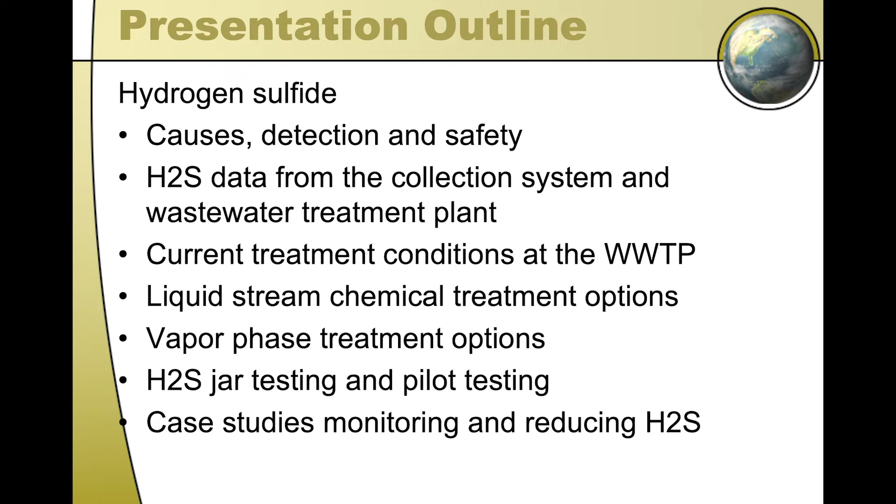So, who works at a wastewater plant? Does your plant have odors? Who has odors at your plant? Which plants don't have odors? Are any of you nose dead? I'm not nose dead yet. I had COVID and lost it for about half a day, then it came right back again.

Can you guys go into your primary clarifiers? How many can? How many can't? Okay, I can't. Been there 35 years and they ask me, why do you work here? I don't know, I'm trying to make things better.

Assuming you can read this, can you guys read this in the back of the room? Because I'm being cut short on my time again. So we're going to look at sulfides, hydrogen sulfides, where it starts, where it arises, a lot of times in the collection system. Bismarck has 22 force mains, 3 private, we work with those as well.

We'll look at the liquid stream options and the vapor phase options. In the water it's called liquid, and once it comes out from turbulence, it's called vapor, and that's where we get complaints from, along with lots of corrosion. And we did lots of testing.

I'm a lab rat on H2S, and we have a lot of case studies here to talk about. This is getting a little smaller. So we always want to know how wide is it, where it's at, what we can do about it, who owns it, what's the flow rates, what's the equipment.

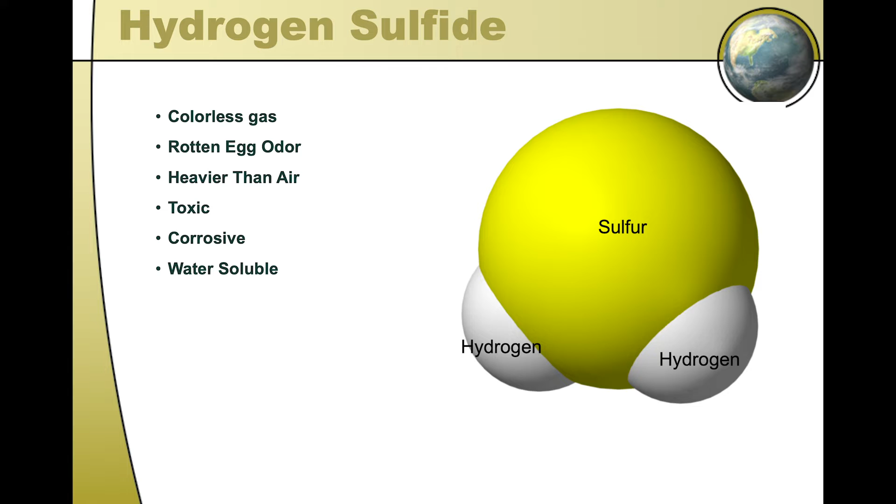So sulfides, rotten egg odor, heavier than air, once it's settled it's toxic, corrosive. We built our new pretreatment building in 2008, and about 8 years later we had $1 million worth of damage from the sulfides. They ate all the concrete, and then pretty soon it started leaking through metal pipes.

Well, this is really small. Okay, so hydrogen sulfide, some people are real sensitive, like me, 0.5, 0.03, I've heard some people say. Then you have all the other stuff that can come out in your sewer system.

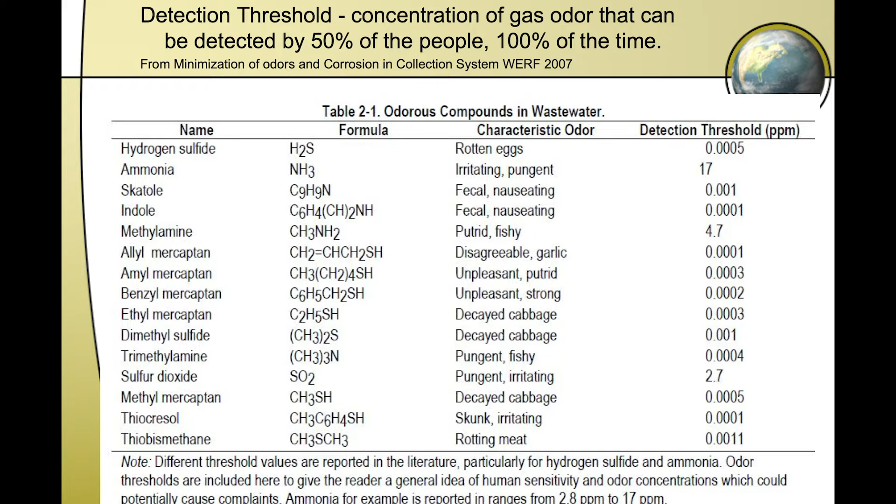Once you start getting above 100 parts per million, you start having some serious issues, let alone in a 10-hour working environment, 8-hour working environment, 10, 20 for a short period of time. And yes, workers can be killed in an environment where they might be exposed to really high levels.

Well, there's a lot of factors that affect the production of hydrogen sulfide. It might be kind of small, so I'll read them. The biggest one is detention time. How long does it sit in your force main?

How often do you refresh your grease interceptors? And what's the temperature? In the winter, we can caustic wash a force main and have 2 or 3 months where it'll stay way down. But in the summer, you get 10 days and it's coming right back up again.

Your BOD, obviously, as everything becomes more efficient, your toilets use a gallon instead of 5 gallons, your washing machine uses 5 or 10 versus 40. We're using less water. Bismarck's wastewater is the same volume as it was 20 years ago.

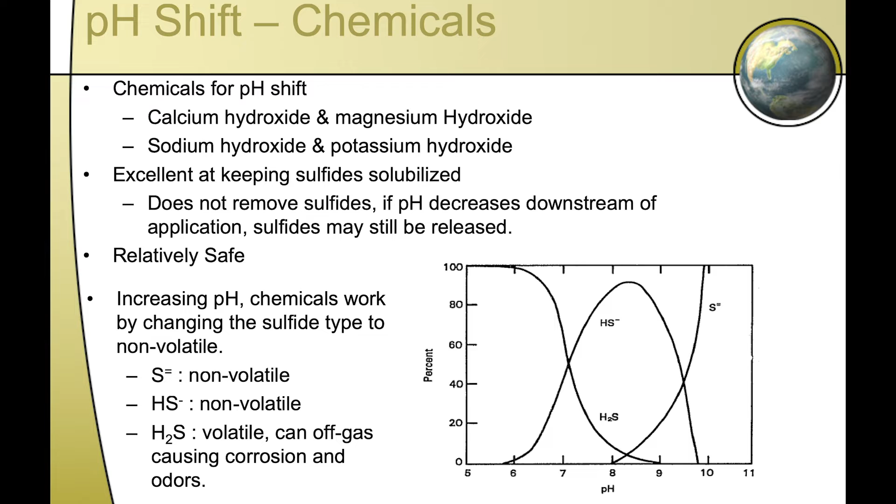The factors that influence H2S releases - the main one is turbulence and pH. For example, at a pH of 7, 50% is HS and 50% is H2S. Only the H2S comes out. If you shift your pH to 9, only 1% can be H2S. That's where caustic helps to clean, or you could use other different chemicals. However, there's an equilibrium, and we'll talk about that more. S-2 is non-volatile, HS is non-volatile.

We've tried a lot of chemicals - calcium hydroxide, magnesium hydroxide, kind of the same.

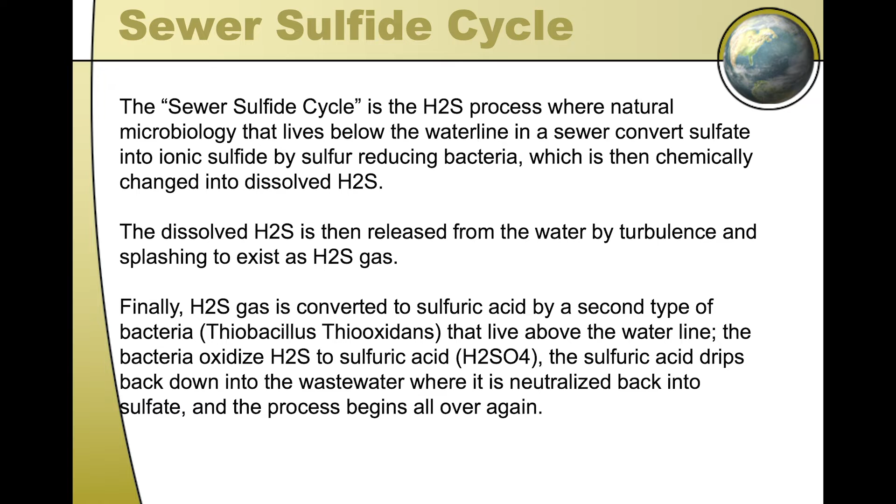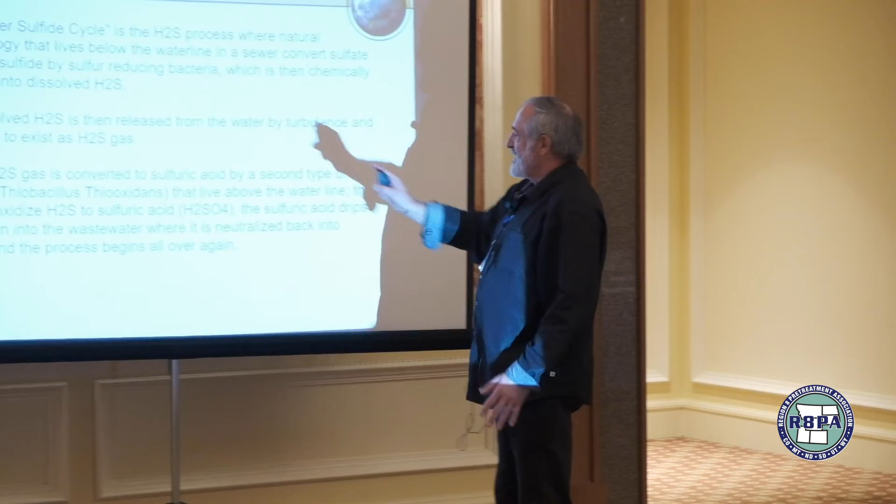When the water runs out of oxygen, the bacteria will get oxygen from where? From sulfate. And then it converts it to H2S. There's the bacteria, Thiobacillus thiooxidans - it's just bacteria related. Once it comes out, it forms sulfuric acid from another bacteria.

But it only happens when the pipe is not full. If the pipe is completely full, there's no release, there's no crown. If you have bad air releases, you'll get crown cutting in your force mains, and it'll eat up your concrete. Why? Because it forms sulfuric acid. What does sulfuric acid do to concrete? It turns your concrete to mush, then it eats away your pipes.

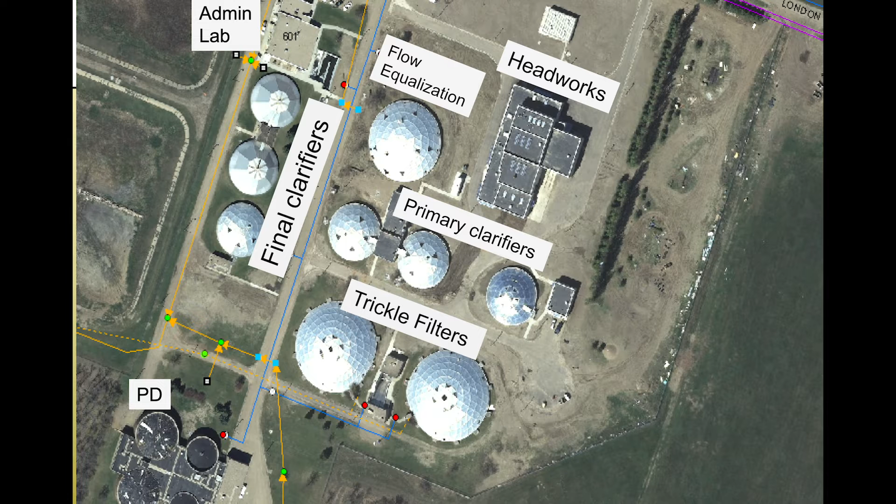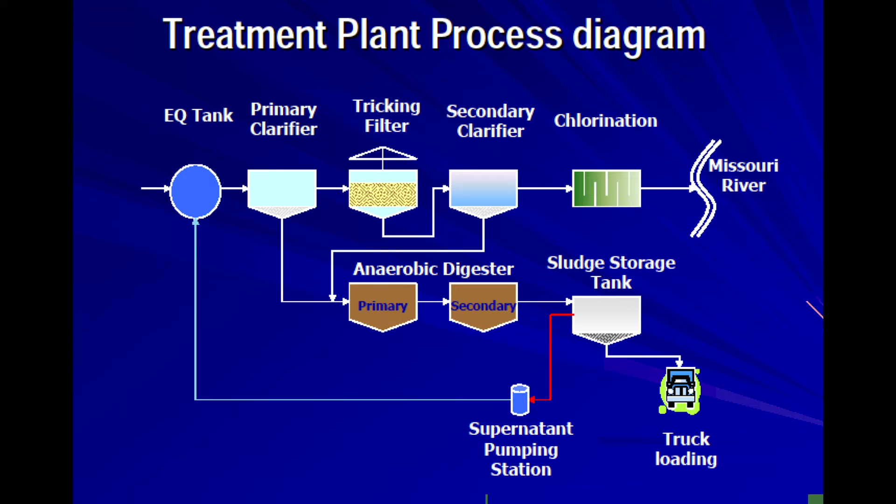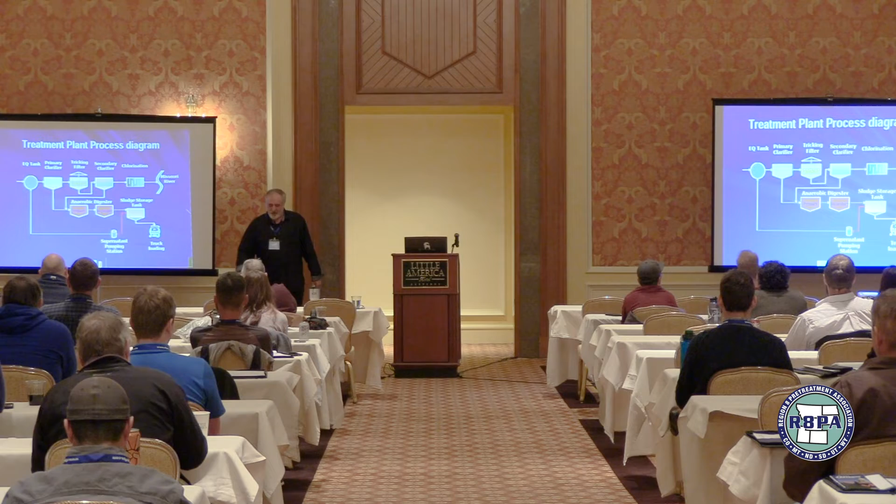So the plant water comes into the headworks or pretreatment building, then either equalization - we're going to add another 1.5 million - and then our clarifiers, and then to a trickle filter, we actually have a third one now. IFAS would probably have been the real thing to go to. Then our final clarifiers, and then we add chlorine and SO2, and then we have the solids processing - anaerobic digestion, thickening.

So where else does H2S come from in our system besides force mains? We haven't done this in a while, but this is from our grease interceptors. We try to get out to the grease interceptors every year and inspect them - are they pumping or not? Do they forget?

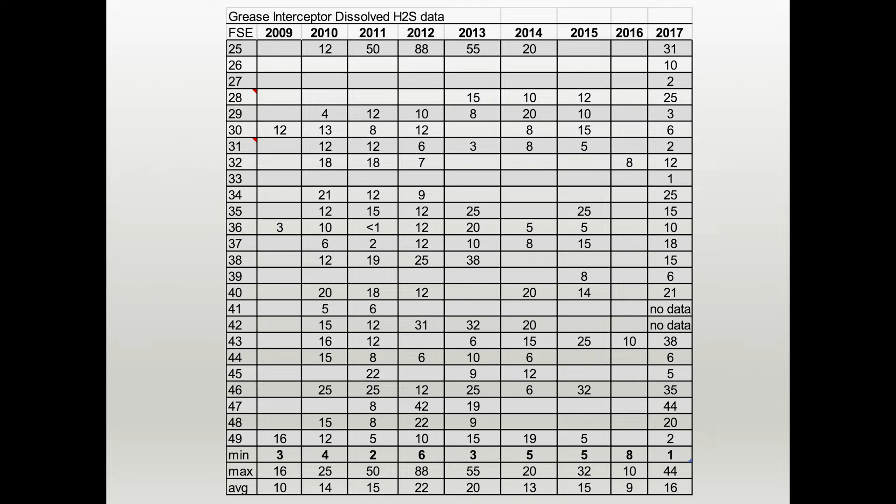I have some averages and some maxes for the years. Here we have 88 parts dissolved H2S, and the pHs are really low too. Do you have pHs on this one here? No - they can get into the 3s and 4s, and they can create a lot of odors. So what we don't want to do is over-design our interceptors - we want to right-size them, make them reasonable size.

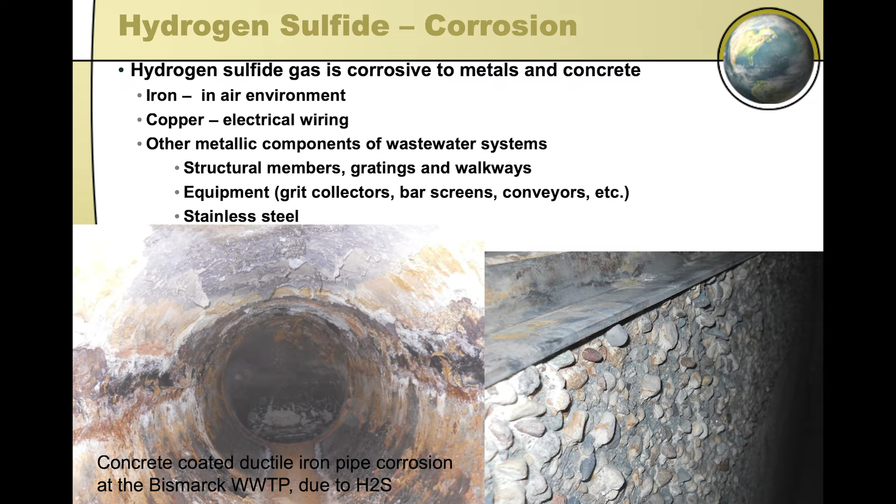We're going to have some pictures here. This is what happens with your concrete pipes - it eats it away, and pretty soon it comes out. This is what happens to metal, much like Adam talked about, from low pHs - like Coca-Cola. Not to pick on Coke, but did you know the pH of Coca-Cola is 3.2? Eventually, when you have high pH concrete and low pH acids, you start to eat away. It also affects your copper, electrical, structural integrity - it even attacks stainless steel.

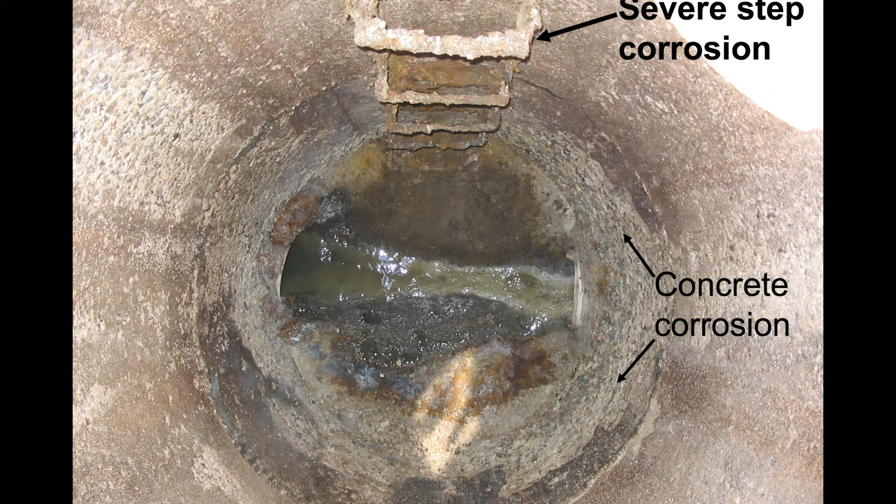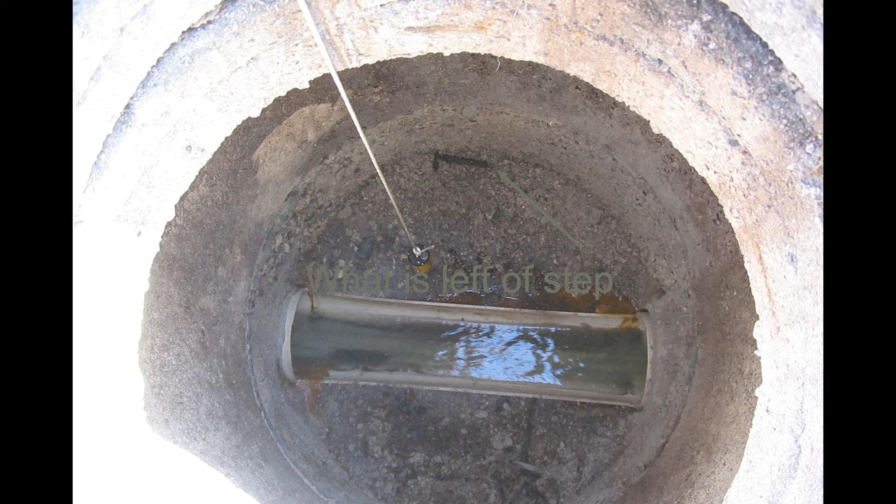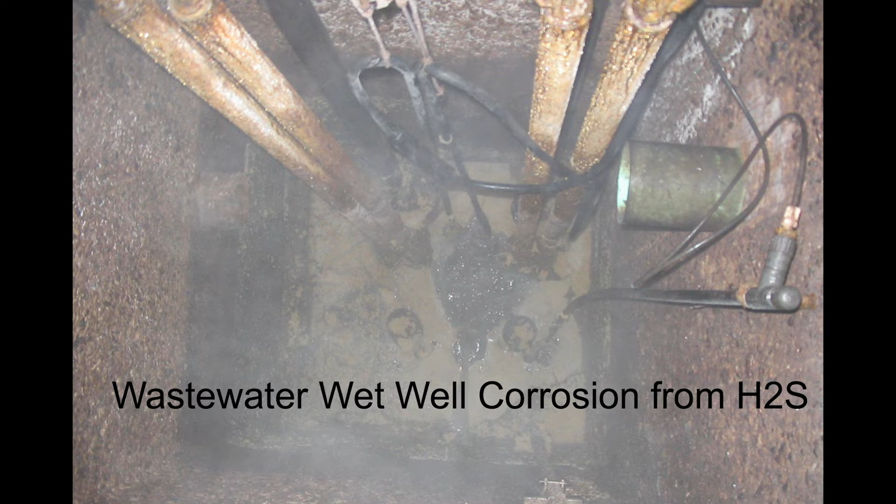So here's kind of the first step of corrosion you're going to see - your steps start getting corroded away. Then some more corrosion, and you can see the severity of corrosion. This is all from H2S - you can see the same thing for pH. Further downstream, there's not even any steps left. Does the pointer work? Nope. In fact, right there, that's what's left of a step. We actually had to go through here and replace all those manholes, which was caused from a force main.

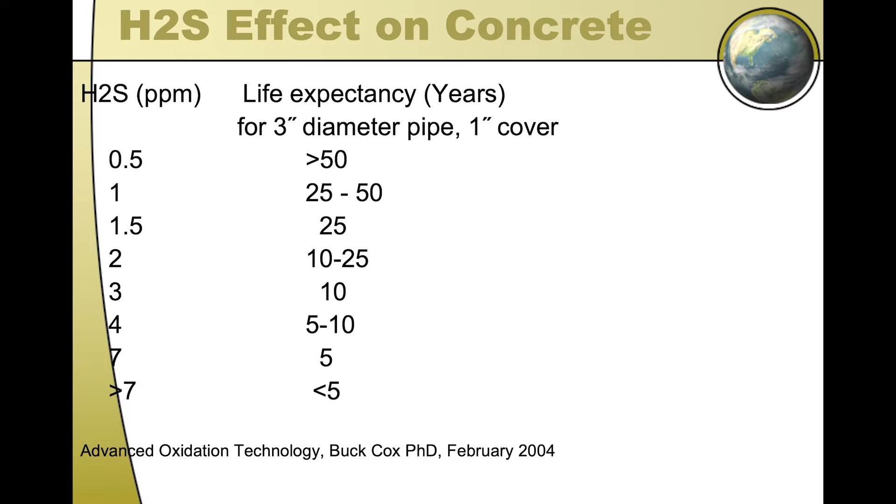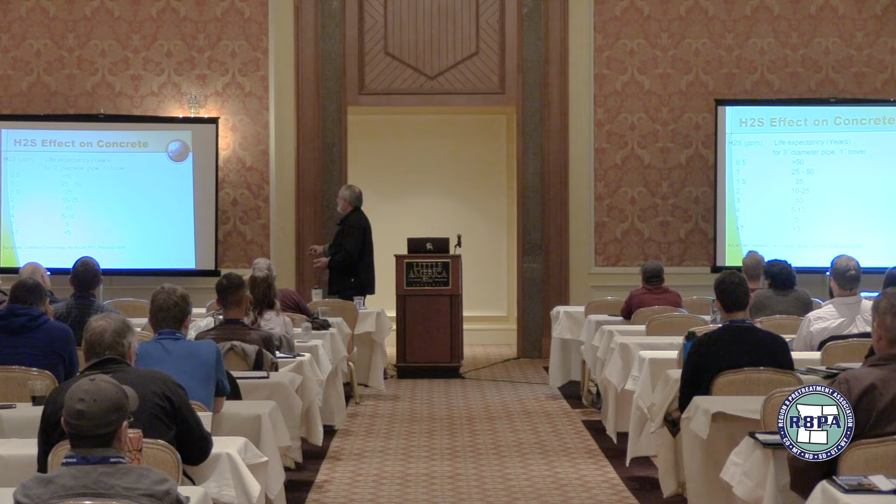How high does the H2S have to be before it eats all your concrete up? This is life expectancy for a 3-inch diameter pipe with 1-inch cover. The higher the H2S, the shorter the life, maybe 5 years continuous exposure. We try to keep H2S at an average of 5 all the time, but we aren't quite doing that this summer.

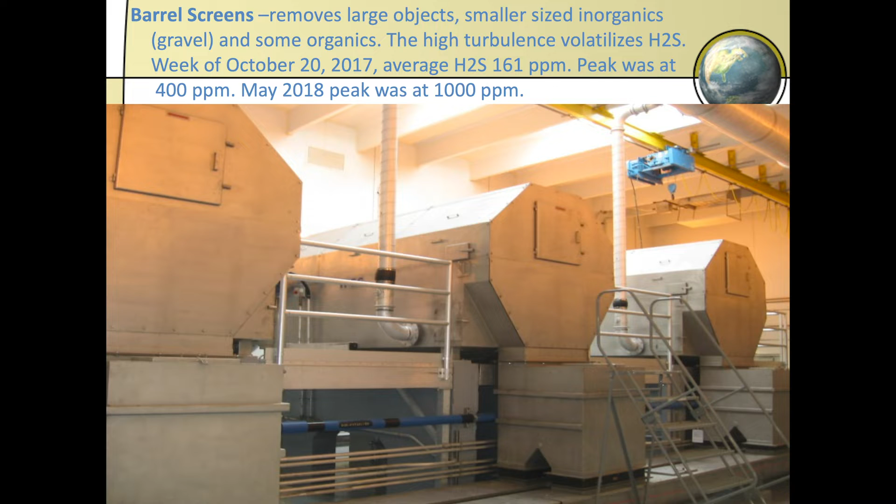One of our first steps, besides the splitter box, we have these big self-cleaning barrel screens, maybe 6 feet in diameter, 12 feet long, I can't remember exactly. Here's what they look like brand new.

Self-cleaning pushes it out, solids come over and drop to the bottom. Here's another picture showing how it pushes the solids forward. That's what happens when you get a lot of rags coming in. We do a lot of public education on rags too.

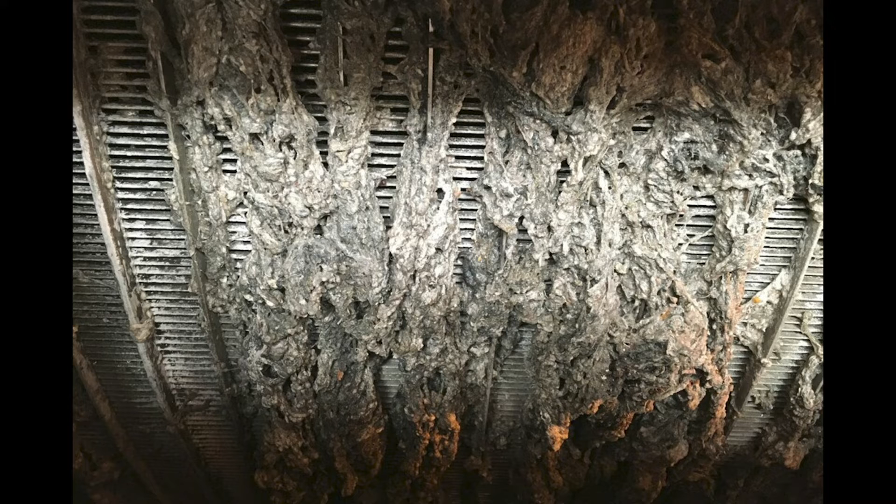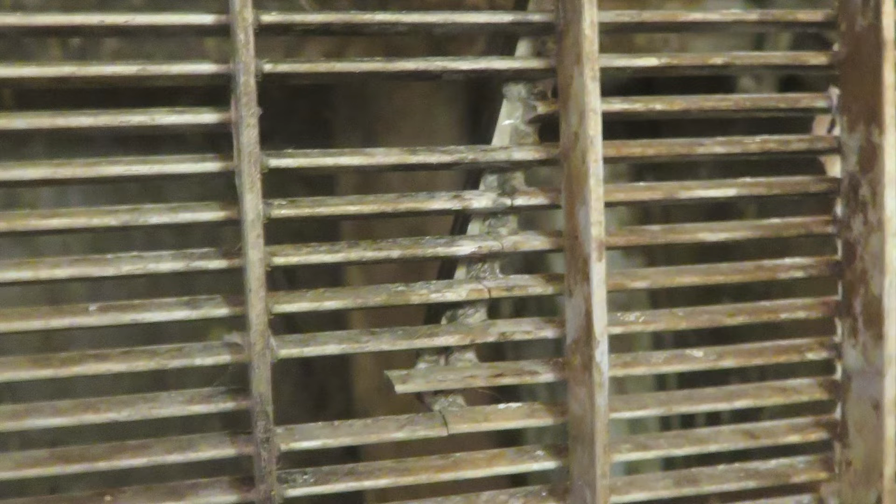That's another presentation I could go on about for half an hour. What do rags do? They like to blind up your screens, and when you grind them up, they get small and start latching onto things.

And what do the sulfides do? They're starting to eat away our stainless steel screens. Our grit chamber is all stainless steel too, and they had to be replaced. They only last about 10 years, when normally we should get 20, 25, or 30 years out of it.

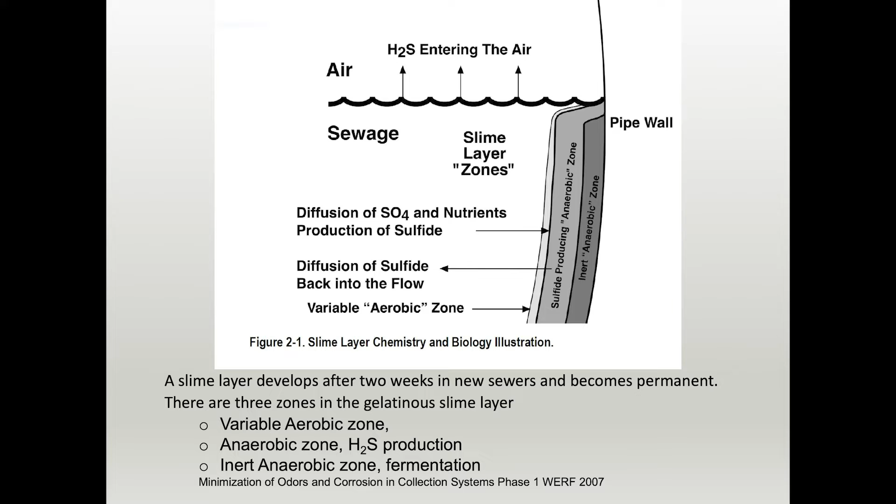A slime layer can develop after 2 weeks in sewers and becomes permanent. There are 3 zones in the gelatinous slime layer: a variable aerobic zone, an anaerobic H2S zone, and an inert anaerobic zone, where fermentation occurs. This whole slime layer is probably as thick as your fingernail.

This happens in water lines too. If you don't keep the water fresh and moving, once you've established biofilm in a water line, you can't get rid of it. However, in sewer lines, you can temporarily remove it by pushing caustic in, getting the pH up to around 12, killing things off, and degreasing.

Here's another colorful one. This came from the 'Minimization of Odors and Corrosion in Collection Systems, Phase 1,' from the Water Environment Research Foundation, 2007. It's about 300 some pages long, and some of these pictures came from that. Very informative if you ever want to work on reducing sulfides in your sewer collection system.

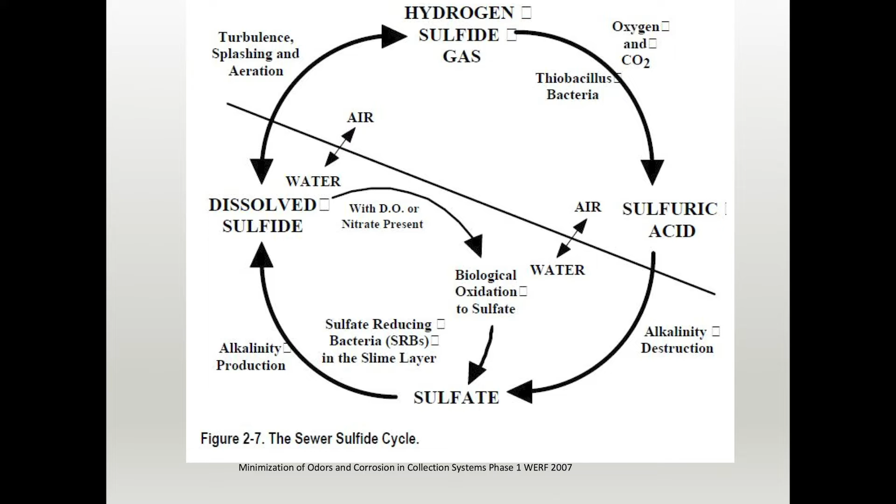Here's your pipe wall, anaerobic zone, sulfide-producing zone, and laminar flow layer - it's a cycle. Let's keep going, here's your H2S cycle. As far as corrosion control or odor control, you can intervene at those different stages. Here's your fancy bacteria - alkalinity destruction, water, sulfuric acid comes back in. It's called the sewer sulfide cycle.

All right. Oh my God, this is small. Whew.

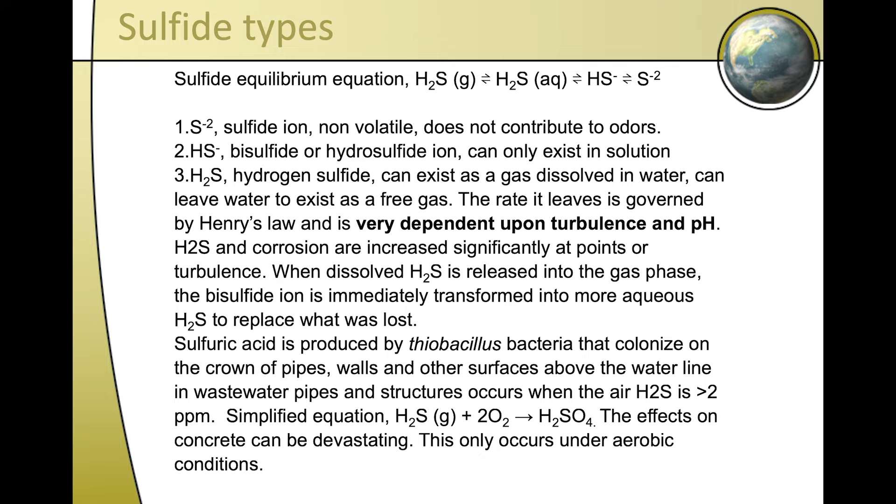S-2, the sulfide ion, is not volatile and does not contribute to odors. HS, the bisulfide or hydrosulfide ion, can only exist in solution. And H2S, hydrogen sulfide, can exist as a gas dissolved in water, and can leave the water to exist as a free gas. The rate it leaves is governed by Henry's law, not Stokes' law, and is very dependent upon turbulence and pH.

So wherever you have turbulence in your sewer system, that's where you get your H2S released. You can do a lot of things to help keep it released, and it's going to affect the crowns of your pipes, the walls, and surfaces above the water line.

You can prevent the first pathway by using things that inhibit bacteria, like anthraquinone, or caustic slugs that we talked about earlier. It can grow back in 3 to 10 days though, and in winter it takes a lot longer because of temperature.

The second pathway, we can use chemicals - we're fighting a liquid phase at that point. Oxygen injection, chemical addition like nitrates, iron salts, peroxide, potassium permanganate, chlorine, ferric chloride. Fargo uses ferrous chloride, is that right, Mark?

What do you guys do? You're on calcium nitrate now? Yeah, we did a lot of experiments in different areas in our city, pilot testing at 5 different sites actually for that.

Where you have a force main coming into a gravity pipe, do you want it to drop and release, or maybe you want to come in below the surface of the water so you can push the bar farther, so it doesn't come out in residential neighborhoods and manholes, and you get a lot of complaints from that.

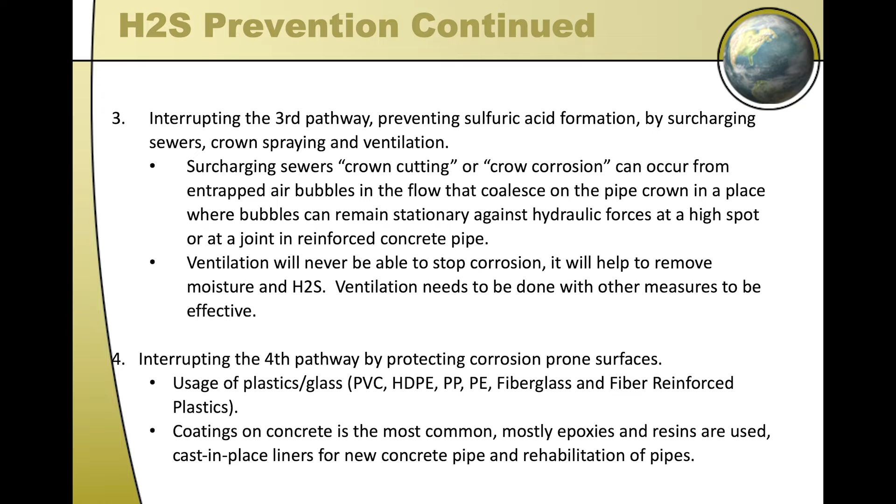If you have H2S and it's in a gravity line, you might want to think about using PVC, high density polyethylene, fiberglass, polypropylene, fiber reinforced plastics, coatings. The coatings have improved a lot. A lot of our coatings have just been ripped off and the concrete turned to mush. In our splitter box for our barrel screen, our splitter box for our primary clarifiers, we're still working on them right now, and we did some of this year as well.

Epoxy resins work pretty well. Again, there's newer technology you might want to look into about what you coat them with.

Oh, like 20 minutes. I have to keep track of my time here.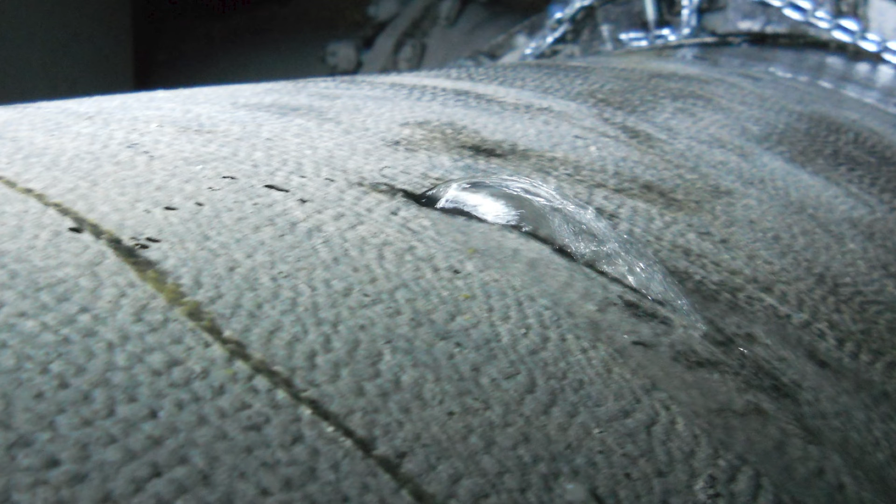And so we're continuously trying to fight that corrosion and protect our infrastructure. Very expensive to replace your infrastructure. This is our old pretreatment building. Again, pretty soon we started seeing water leaking out of our pipes.

And we strapped on, we epoxied, and it just kept getting worse and worse. Whatever we did, we tried putting plugs on it, and pretty soon they were gone. You can see right here, the concrete is all gone on the top. And then pretty soon it started eating away. These pipes are only 8 years old.

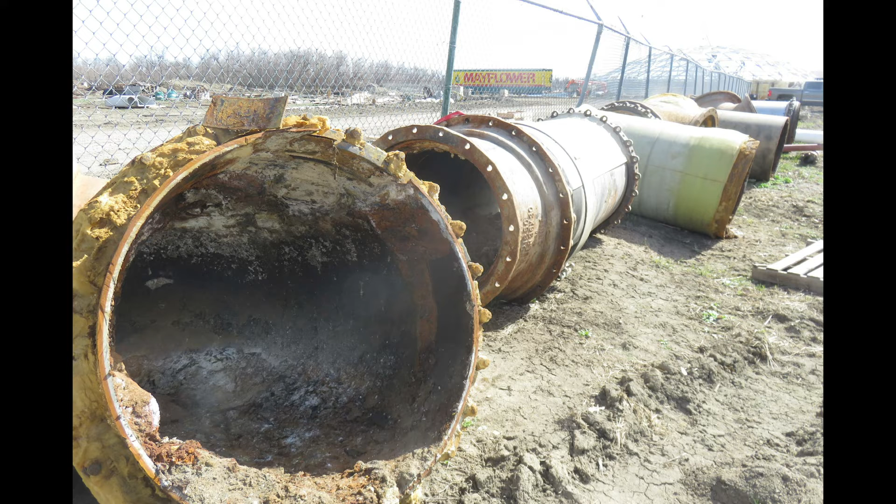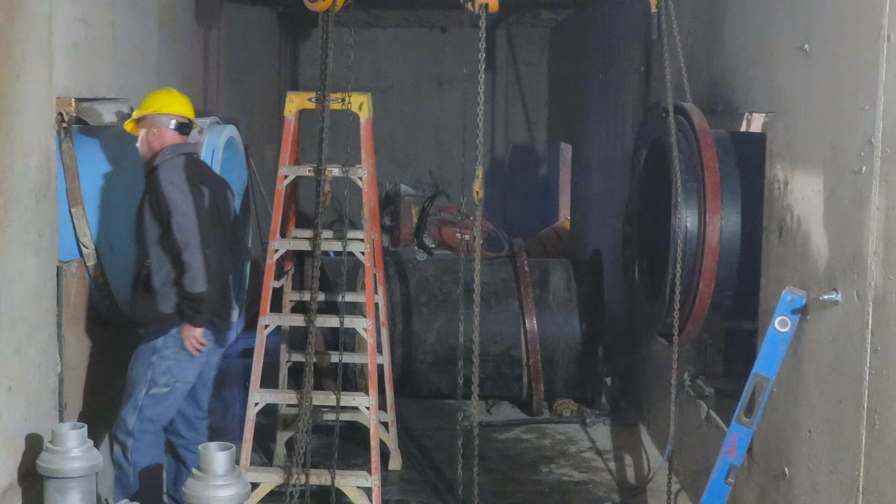What do we have to do? Oh, rip them out. Keep them from leaking out the door and having SSOs from our pretreatment. And here comes the blue pipes - 30 inches, 24 inches. There's a little bit of metal holding them together in some places.

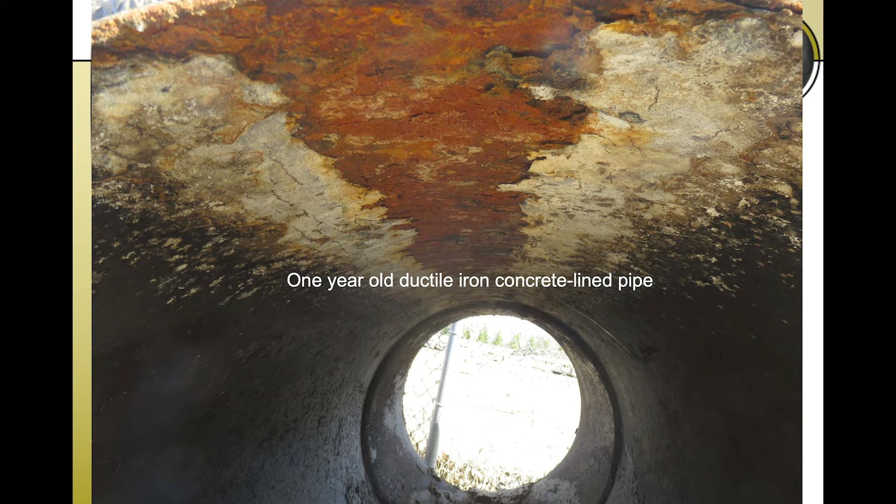Here's a 1-year-old ductile iron pipe. It was supposed to be full of water, and it came out of our primary clarifier, and most of the sulfides are gone already. However, this pipe only ran half full, and it cut this groove right on top, and it's eaten away the concrete - it's kind of like mashed potatoes.

And then pretty soon it's going to eat a hole right through it. So this is another close to $1 million, half a million dollar project to either reline or replace. We got a quote on it - it was pretty good, and then he backed out, forgot that he forgot to add some money in it, and he wants to back out. But again, that's currently happening right now.

What can you do? Nitrate salts - what's Fargo doing right now? Minot, North Dakota is looking at that. Iron salts, we've tried those - we do have that at the treatment plant. They kind of precipitate it out.

Nitrates give it oxygen. Oxidizers, many different types. Oxygen - that's what I'm in favor of. In about 2 years from now, we're going to get some oxygen generators right before the plant. We're going to pipe alongside it and inject oxygen into it, maybe 40, 50 milligrams per liter, so it ties the H2S up before it hits the plant. We know we won't be able to do all of it, but maybe 80, 90%, and at least try to protect our equipment more. You can also mess with the pH - remember how that pH, if you shift the pH, then you have the HS versus the H2S.

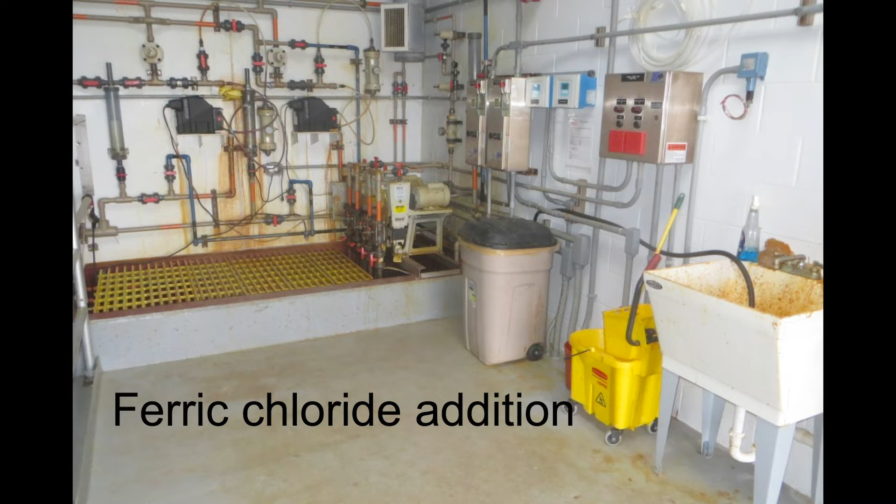Nothing's forever. Oxygen, we talked about earlier, that's what I want to see. At the plant, chlorine, we've done that a lot. Ferric chloride, ferrous chloride, which Fargo used to add, as far as I know. pH shifts, okay. This is where we add ferric chloride at the plant, stains everything.

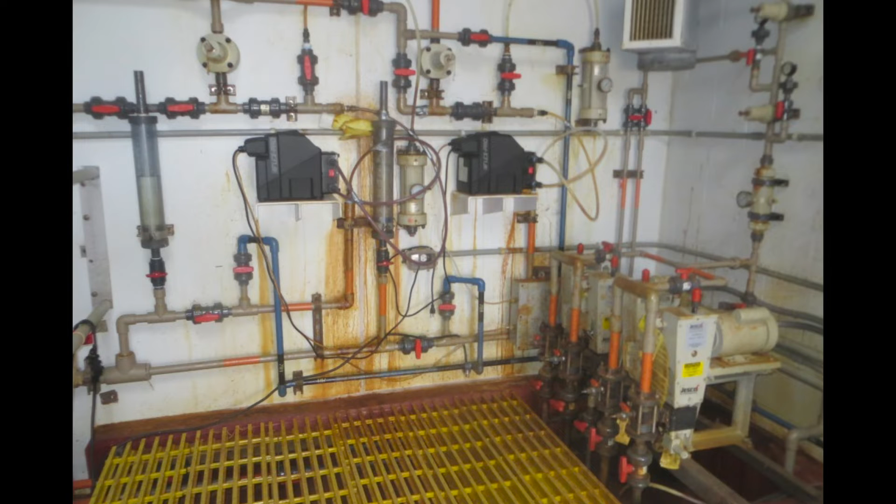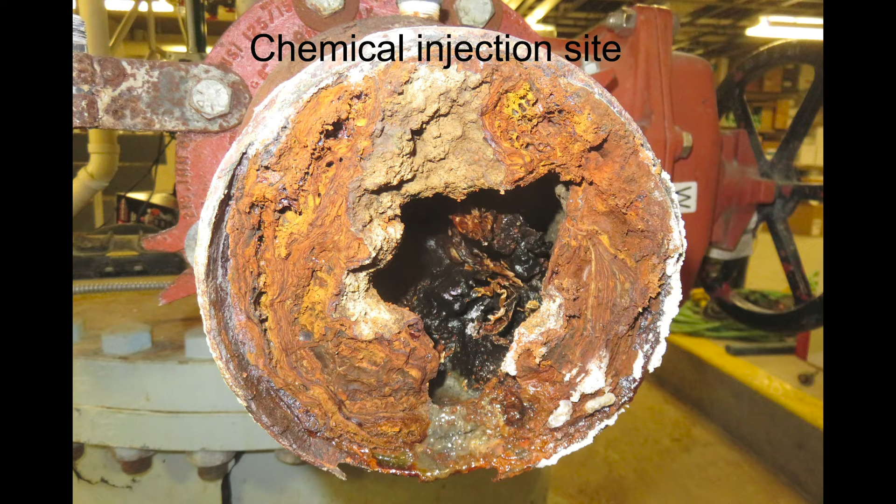We have a couple, maybe 10,000 gallon tanks or something. And here's sodium hydroxide for our odor control unit because the pH is about 0.5 to 1 on a good day. This is what happens when you inject bleach into plant water pipe. So beware that wherever you add this chemical in a pipe, it wants to form corrosion. That was quite a few years, probably 15 or so.

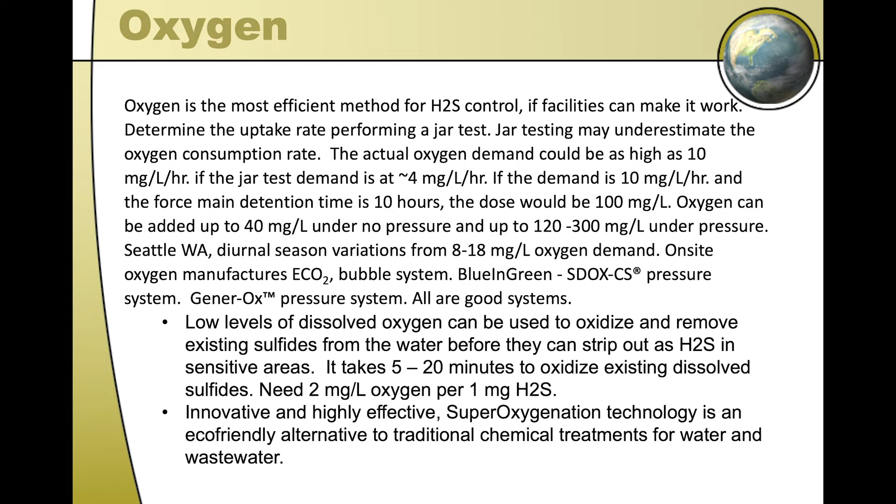So oxygen can be added up to 40 milligrams per liter with no pressure, and 120 to 300 milligrams per liter oxygen into your water under pressure. And the byproduct is no issue, CO2 and water. Seattle, Washington, again, some of this stuff, other cities were doing it at WEFTEC. Here's some of the ECO2 bubble system, BlueInGreen and Gener-Ox. I guess what I heard is that they're all good.

It will remove the H2S, but it takes, we aren't sure for sure, but 5 to 20 minutes. So at a lift station would be best, but at least 5 or 10 minutes before the water gets to the POTW. And you need 2 milligrams per liter of oxygen per milligram per liter of H2S. So if you have 10 H2S, you're going to need at least 20 oxygen or more.

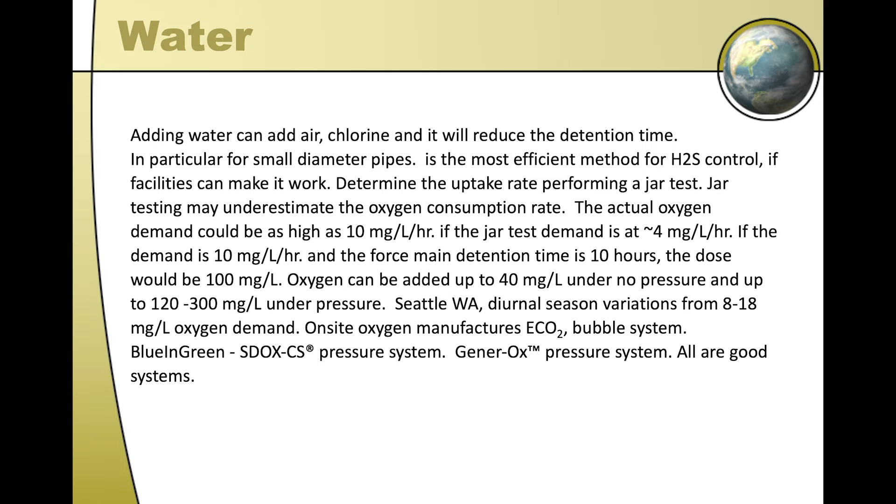Water. Can water work? It sure can. If you've got a 4-inch or 6-inch pipe with just 10 customers on it, when it's designed for 200 customers and it's brand new, what'll water do? There's oxygen in it, there's chlorine in it, and what does it do to the detention time in the force main? Reduces it.

Higher detention time, the more generation of H2S. So if you can push water through it, we are doing that in 2 locations in Bismarck - Misty Waters, that new expensive development by the river, and then way north, another Misty Waters. We're adding water, 30,000 gallons a day at one, 15,000 gallons a day at the other.

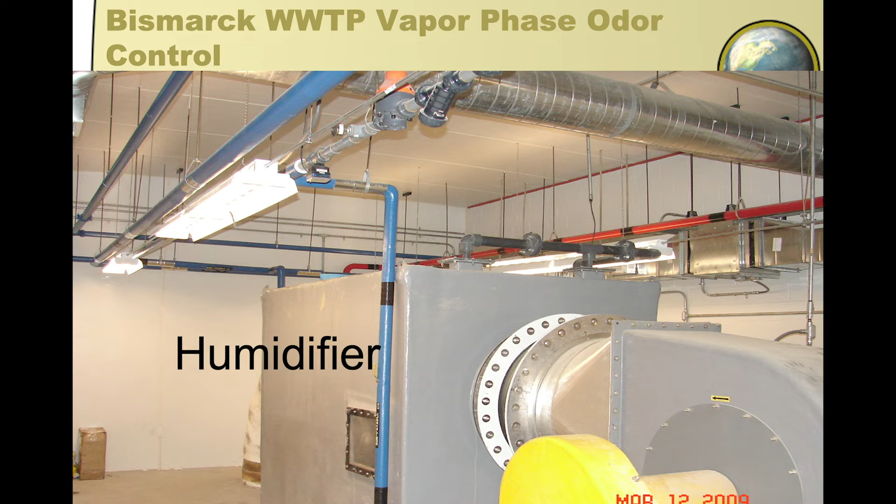All right, so what we do in Bismarck - we have this new pretreatment building which already has severe corrosion in it. We're trying to remove it, and everything is covered except for a couple areas, and those 2 areas I can't go into because the H2S comes out a little bit. We have 16,000 cubic feet per minute of air that goes through.

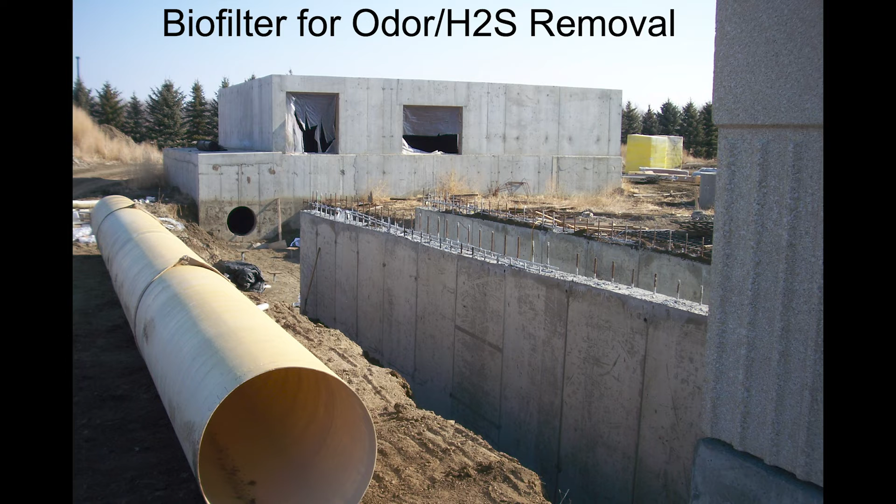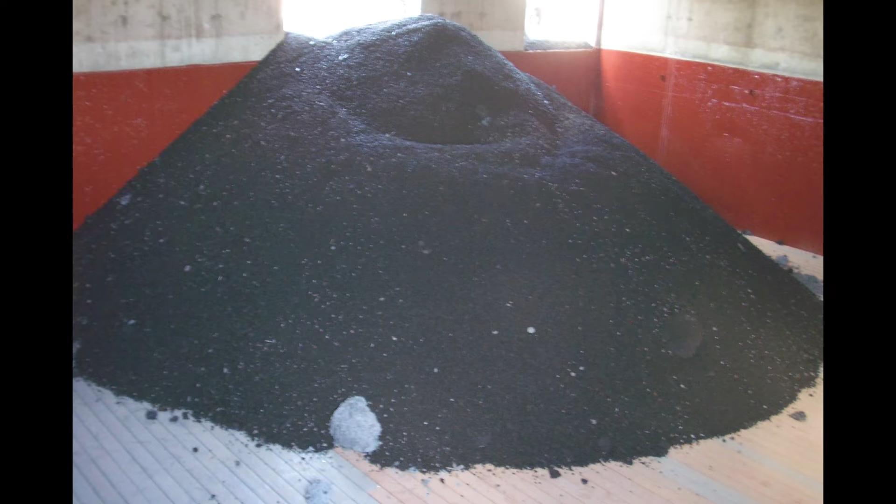We capture it and humidify it first, because it likes to have at least 96% to 98% humidity. Then it goes underground into this building, into a biofilter we built here. They put all this flooring down, and lava rock - it's proprietary, probably potassium permanganate with something like lava rock, along with maybe some wood chips in it. We filled it all up, and there's an irrigation system alongside to help wash it through.

And it worked pretty well for a while, until all the media collapsed and all the coatings went to hell and started eating it up. So we had to recoat it with new coatings again. It probably lasted at least about 5 years, maybe 4 or 5 years - that's all the longer it lasted.

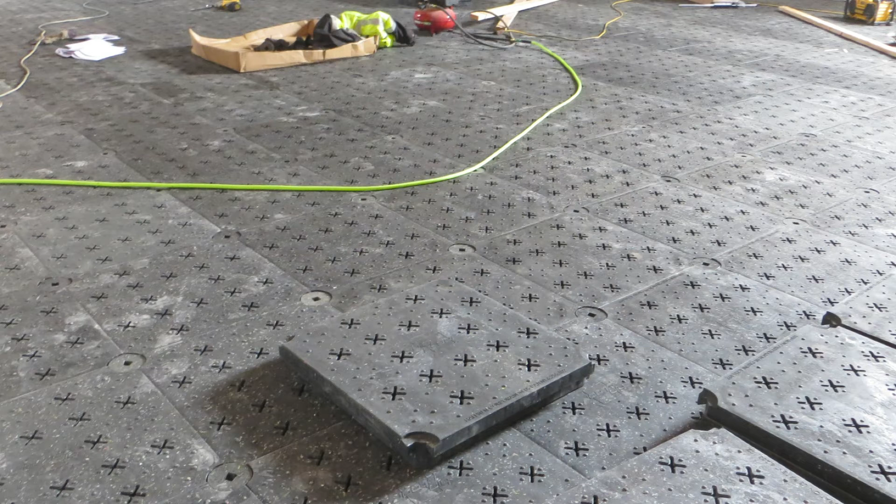So then they put in high-density polyethylene, some cool-looking stuff, because HDPE is very corrosion resistant. Again, where we have high sulfides, HDPE works really well. I also like that in interceptors too - high-density polyethylene interceptors, we'll talk about that in a minute. So here's a zoomed-in view, you can see how the air can flow - it's a bottom-flow-up design.

It's between 2 and 4% sulfuric acid that it generates from taking H2S and removing it, and the pH is about 0.5 to 1. So they replaced all the media again and put it back in.

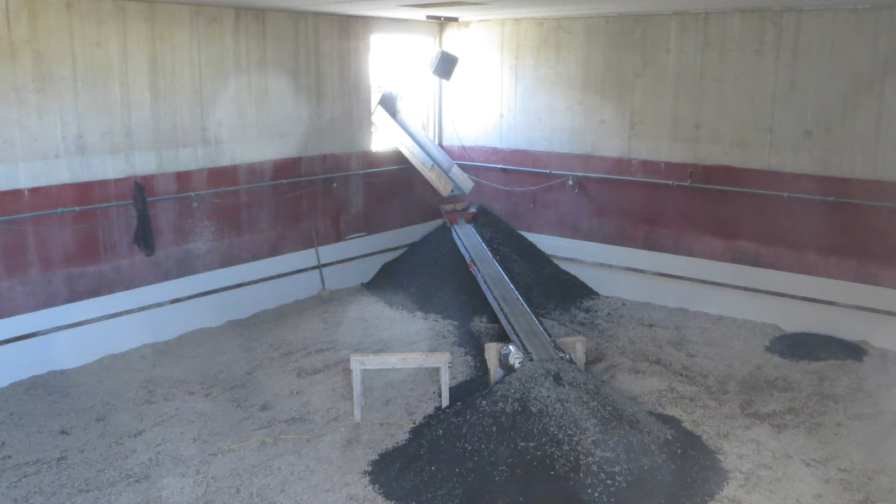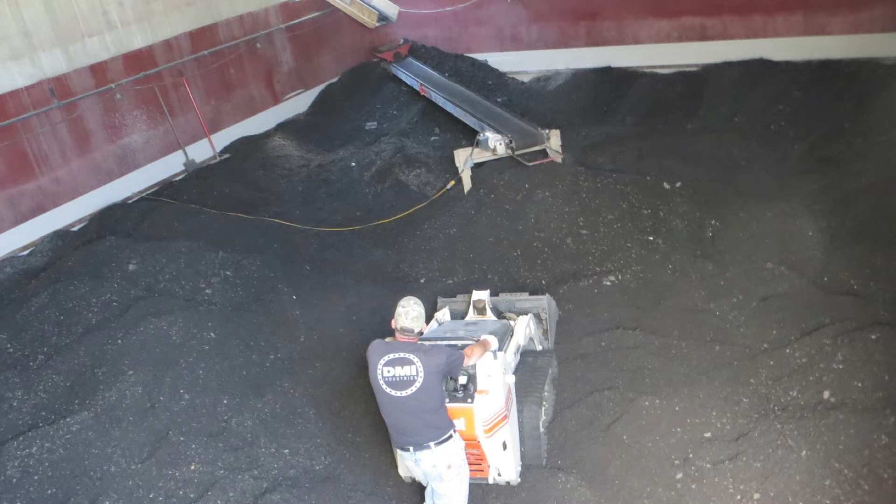All right, so what's your action plan to reduce odors? Every force main is different, every city is different - you have to look at every one as being unique, they aren't the same. Detention time is different, and what chemical you might use could be different here.

We're going to get into some pilot test studies if I can move along faster. So collect your data, determine your options, do some bench testing, and then some pilot testing, and analyze your data - how well it works for you.

Here's a really cheap, inefficient test by Hach - H2S, methylene blue. We have a lot of these here, probably 12. We don't only have those, we also have a lot of the gas tech personal monitors nowadays.

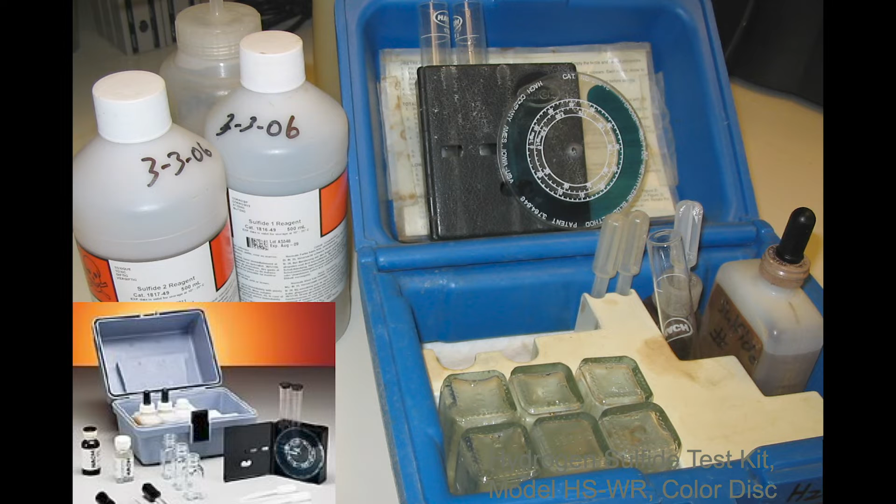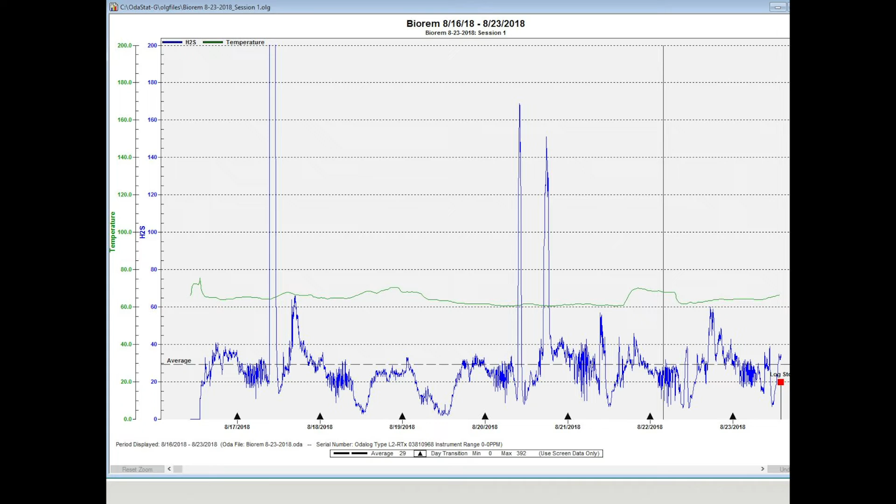Oh, we're in a case study here - and the Biorem, wow, this is really hard to read. This shows peaks when they do force main switches, up to 392, with an average of 29. It was designed to average 30, so we're pushing it pretty hard. This is the building that it's in, right here.

So, nope, that's a screw pump influent. I lied.

Headworks is where it's supposed to protect, because we don't want sulfides going high to our trickle filters, or we'll wipe them out. I see it cut off the pretreatment building. Screw pump influent. It peaked out at...

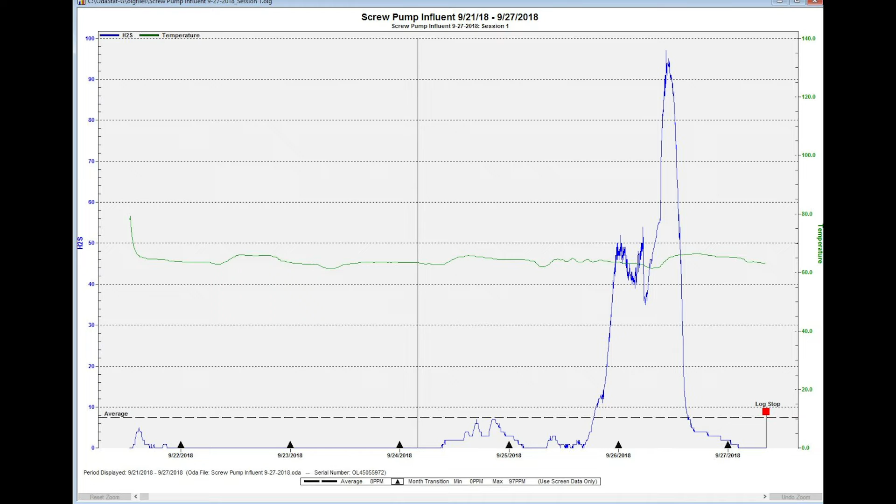Let's see, where is it? 90, yep. And normally it's running 0. So when we flop our force mains over, then it hits our plant really high. And that's why we decided to equalize it and push it through really slow, so it doesn't cause a plant upset.

Okay, so the force mains, we have a 30-inch and a 24 from Washington coming down to the treatment plant. The detention time is about 3 hours. But if you have both on, it's 4.5 roughly. And then the other one, Wachter, is 2 hours and 2.9 hours. Again, we didn't used to have 2 force mains, but we wanted them to be redundant in case one broke. And we have had that happen - one leaked, and so we had to quickly repair it, the Wachter one.

Flows, probably not that important. 12,600 feet, you start getting real long force mains, higher detention time. Another area south of here.

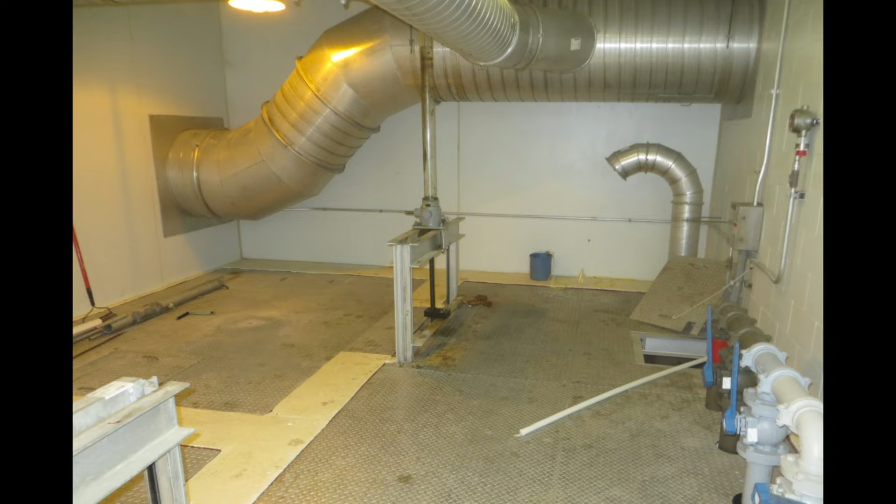This is where we sample in our pretreatment building where it comes in. This is the barrel screen splitter box. That's the sampling manhole right there. And then pretreatment effluent, primary clarifier, splitter box.

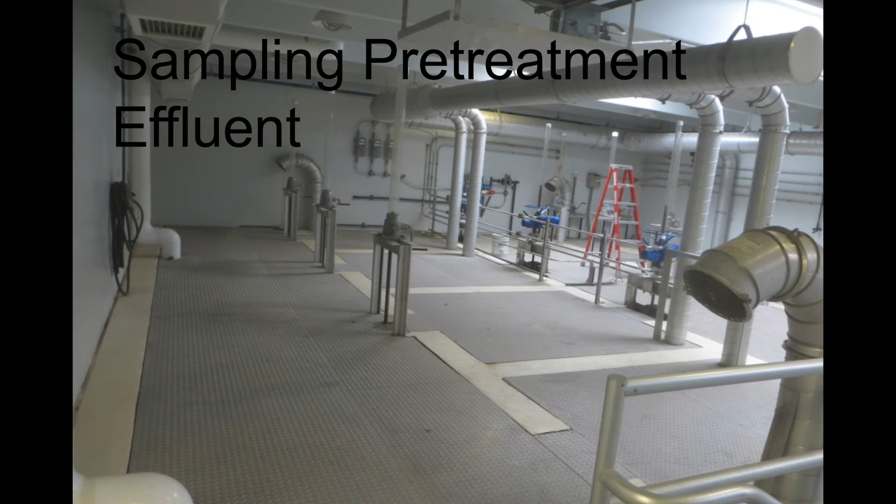Different chemicals you could add. We talked about all these: oxygen, chlorine, bleach, peroxide, potassium permanganate, sodium, iron salts, calcium, magnesium.

We have a private 3-mile force main, probably only about 10,000, maybe 20,000 tops. Collection staff called us and said the door's rotting off. They tried to open the door and it kind of fell apart, and their vents are just gone. And so, well, let's find out where it's coming from.

And then we did some dissolved air monitoring, no chemical addition. We saw some high H2S. This was way before we had the odor loggers. And then they started adding 4 gallons, knocked it to nothing.

They added permanganate, it went back up again. And then they started adding bleach again, 525. Normally your Azone is about 12 and a half. So when they add about a gallon and a half, 2 gallons, it keeps the sulfides down.

Case study 2, Riverwood Drive, private. They thought they had this lift station - well, the odors won't come out so quickly. Instead of pumping it when it's 2 or 3 feet, and it pumps so often, we get odors all the time. Well, we'll just pump it when it's 15 feet.

The clock starts when you start holding the water. And then it got really bad. And then we had an interceptor that was over-designed there too.

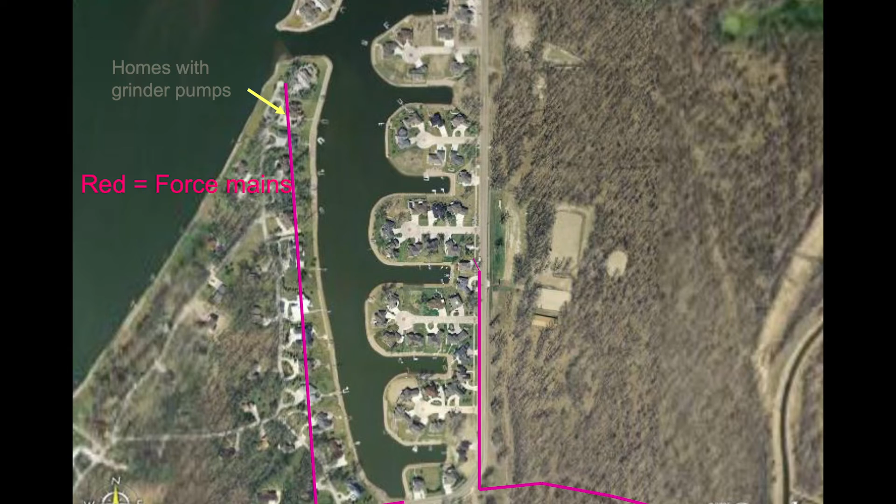Pilot testing Southport Force Main.

Some really high sulfides, 7-day averages, Azone, calcium nitrate. Southport takes that water from that big facility. They had a 4-inch pipe and kind of greased it up, so they went to a 6-inch. We're still struggling with that one. We're adding water upstream of it, another lift station pumps into that one, and we're adding roughly 32,000 gallons a day of water. That's really knocked it down quite a bit, so it's helped out a lot. You can see here the H2S is really low now.

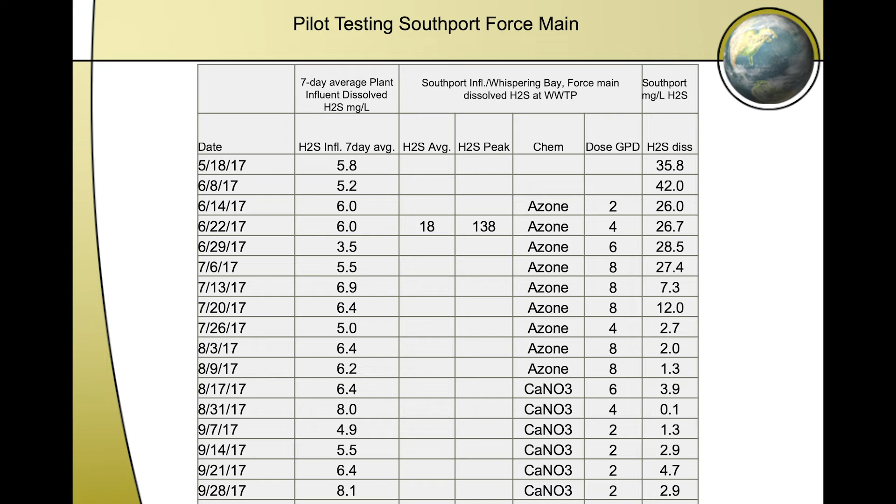Oh yeah, we had a bacteria salesman. We don't have one here, do we? Good.

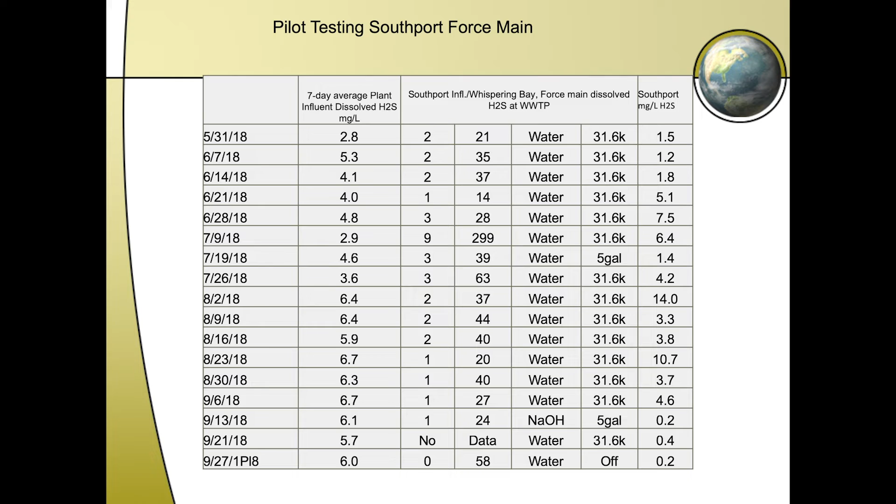So we turned the water off, and they said the bacteria will work, and it kept going up and up and up, so we turned it off and went back to our water. In this case it didn't work, but he said it was going to work great—here's 1 week, 2 weeks, 3 weeks, we'll keep going, it's going to get better. No, it keeps getting worse, so we stopped using it. Again, it doesn't mean it won't work in your situation somewhere else. I don't want to discredit some stuff, but remember, each system, each force main, each area is going to have some uniqueness to it.

We talked about increasing pumping frequency, reducing the holding time, increasing the water flow. Oh, at the airport—that was a stinky one too.

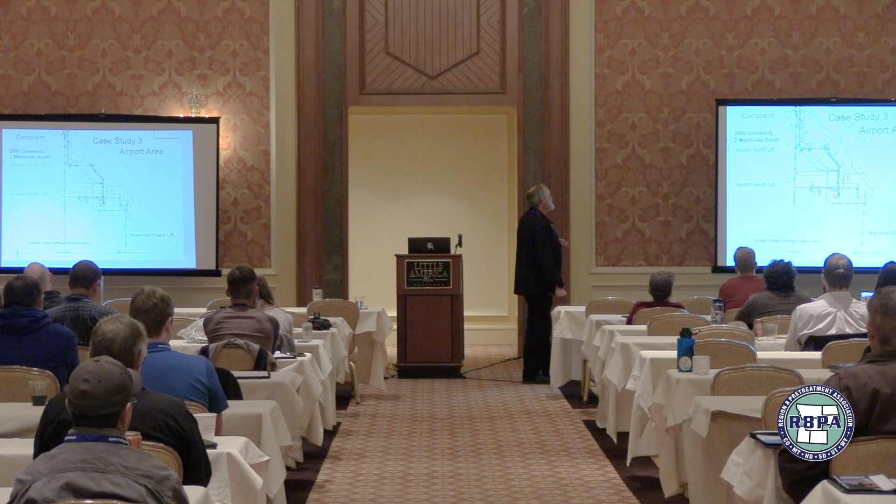That was actually those manholes you saw where the steps just disappeared in concrete. There's a grease interceptor there, and we have a north one. See how short it is—no issue, maybe a half hour detention time, no problem. But this one here has lots of problems.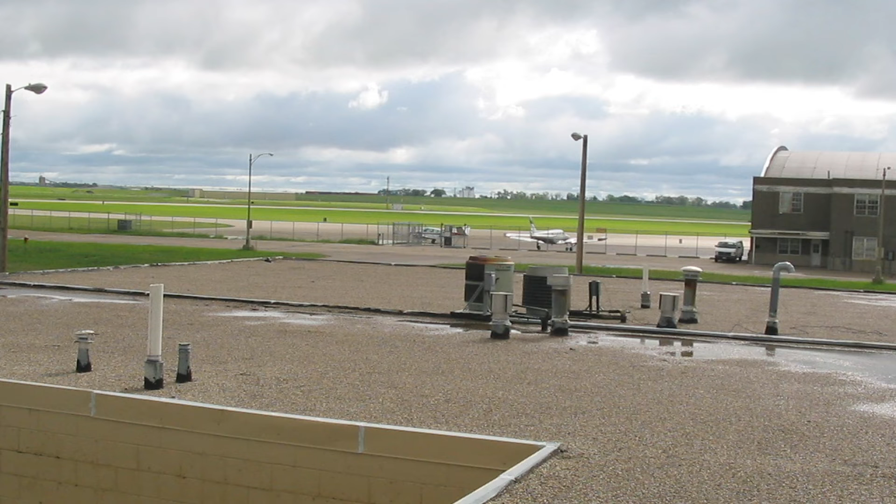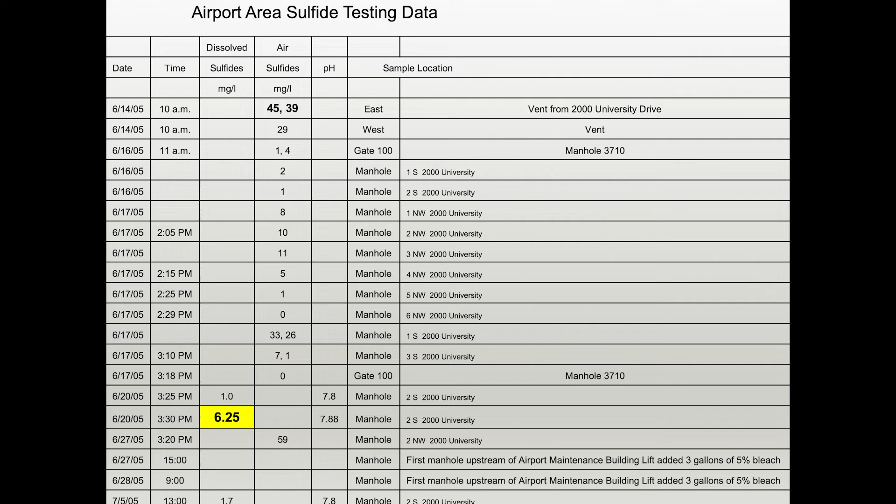So at the airport, people live downstream. Initially, way back in 2005, we had an odor logger. We saw dissolved sulfide of 6 parts coming in. Tick times 10 to 100, and that's what's being released. The sewer system's interconnected everywhere—all those gravity pipes vent through your home, through the businesses' homes. It's an aeration system, so whatever happens somewhere, it goes somewhere else.

And if you have a business, their makeup air gear is on the roof. Where's their sewer vent? On the roof. With a certain wind direction, it blows right in. Oh, okay, so it's the city's problem, right? I guess it is, so we try to solve it for them.

And we did, on this one here. What did we do? Well, that's what it was before. Here's the odor logger data—pumps kick on, you get 90 parts per million, 10 parts average. And you can smell it 1,000 times lower.

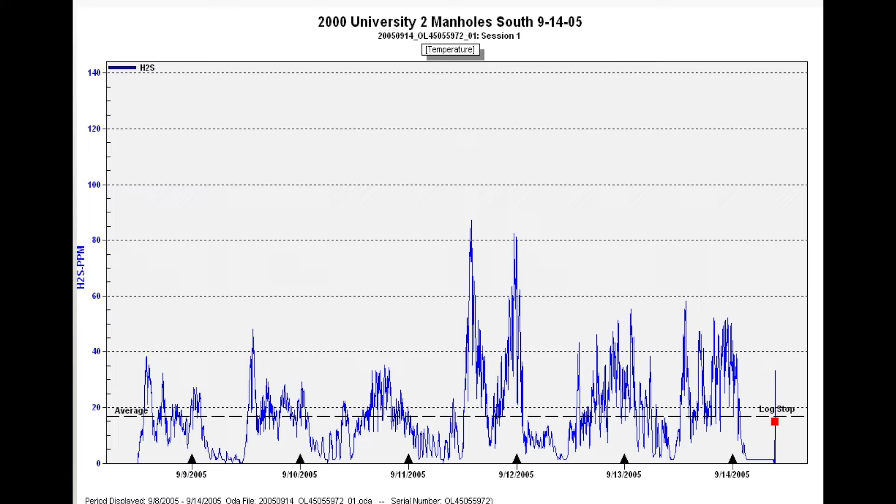All right, here's some more stuff. What did we do? Now we've got a 100-gallon one, but we started off with 2 and 4, messed around, got complaints, and finally put her at 10 gallons a day and left it there. It's about a 40,000 gallons per day force main.

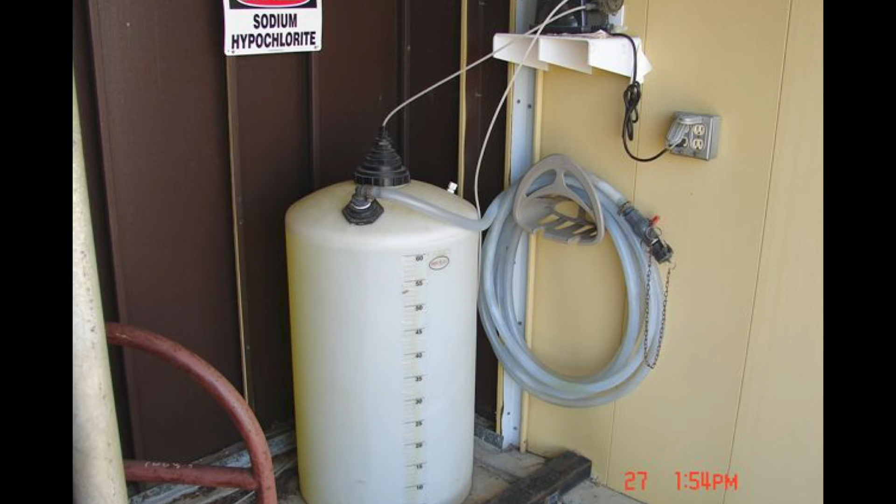And what happened to it? Whew, look at that—flatlined it. Then we maybe caustic washed it, and then we turned the chlorine on. So now we're down to about 7, but we don't dare go any lower—7 gallons a day of 12.5% bleach guaranteed. They call it Azone. It can be up to about 15, but again, it's $4 a gallon, though when we bid it'll be lower versus gas.

Case study 5, Hay Creek, which goes to the Wachter force main. Actually it goes through the 26th Street force main, then a Wachter force main, and then comes to the plant. We have 3 force mains in a row, sometimes even 4. The more force mains you have in a row, the worse it gets, because it just keeps seeding and goes back quickly. This problem—when I first started, we had it 35 years ago. It's still there, and it's going to outlive me and all the people there. Seriously, H2S—and we're going to build 3 more force mains in our city. So again, you have to keep it down, or you're going to ruin your infrastructure.

So this is what caustic soda does. We had a 275 there, and that was right in front of it.

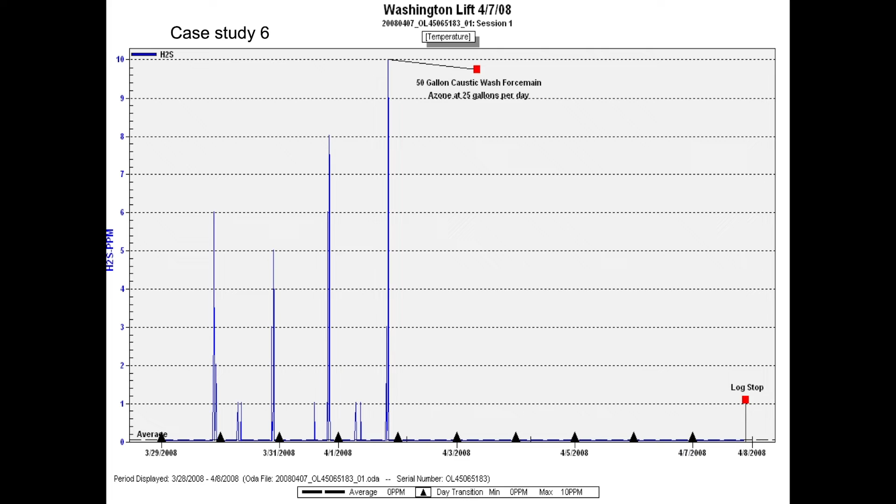Washington lift station, kind of the same thing, 50 gallons. That's coming from a force main upstream, but it's only like a 10-inch pipe, so we can get by with 50. At some places we can get by with 5 or 10, sometimes 50, sometimes 100, sometimes 275. Again, the larger the flow, the more you're going to have to add to it to get the pH way up. Washington lift station.

All over the place, this is the H2S peak. And then again, we added some bleach and knocked it down. Washington, again, here's our bleach. But sometimes it comes right back up again for no expected reason, other than our landfill gave us 275 gallons of ethylene glycol.

Oh really, when we talked about BOD, yeah. What's the BOD of ethylene glycol? Hundreds of thousands. I know you talked earlier about a 0.5 or 0.6, that's good stuff, but bad stuff is about 0.1. This glycol is right around 0.6. So it's that BOD to COD ratio. Again, here's a big food source, and it went up again.

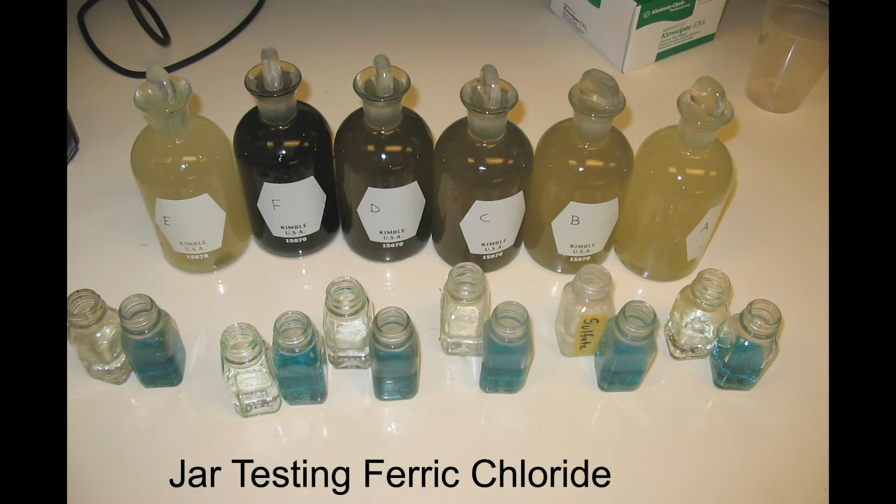Iron, ferric chloride, testing to sulfide, see how it works. How do we get here? Historical information, investigation of original assumptions, jar testing, bench testing, and again, guess what? It costs money. You know, we budget a couple hundred thousand dollars a year for chemicals in our system, but that same amount at the plant. It's not cheap, otherwise, if you don't do it, it's going to ruin your infrastructure much quicker, and you're going to have to spend money on infrastructure repairs.

Airstream odor removal options. Talked about a scrubber that we have. Again, here's the cost factors, advantages, the disadvantages, and let me check my clock, am I getting out of time yet? Pretty quick. Biofilter, that's what we got. Medium frequency of use, low capital and operation maintenance cost, simple to use, VOC effective, media replacement, moisture monitoring. Works pretty good.

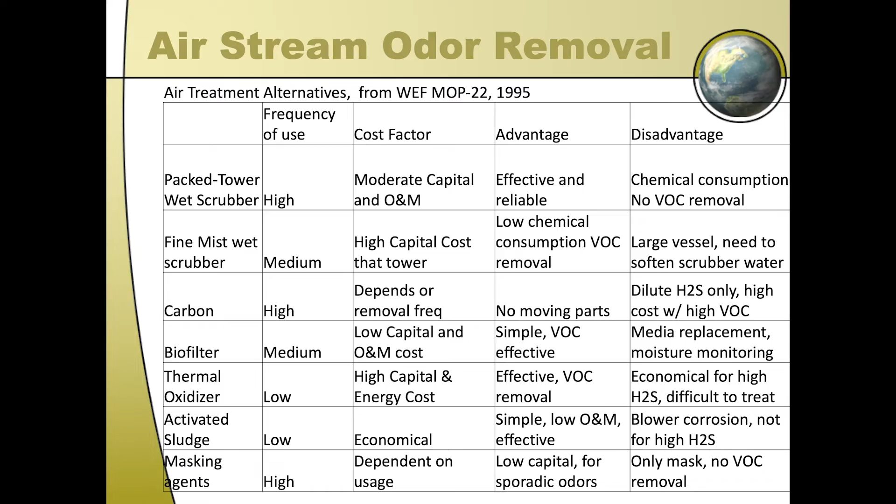So again, you have consulting engineers help you work out if you decide you want to put something in, and where you want to put it. You can bring it into activated sludge too, but again, you could have some release. Masking agents, we used to use a lot of those in our pretreatment building to make it kind of perfumey, and berry cherry was one of my favorites, but again, we got away from that. You got all this sulfides, let's cover it up, right? No, you still stink, sorta. Some people will recognize right through that.

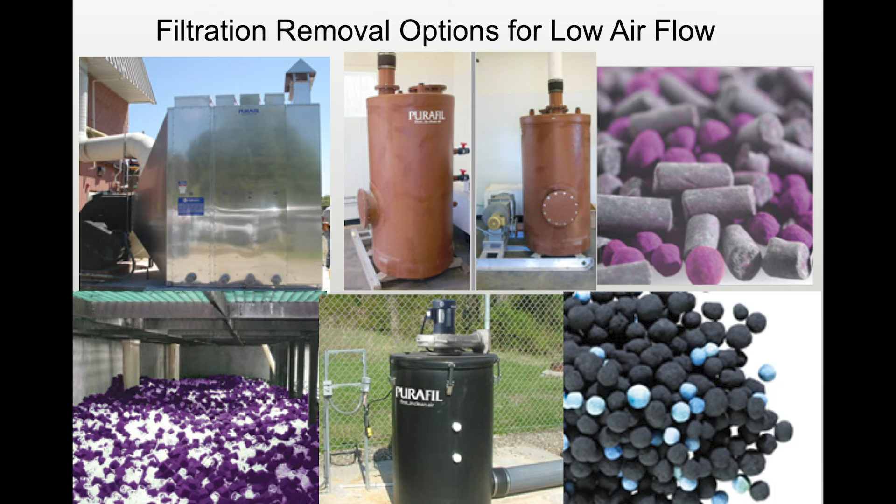All right, so here's a biofilter. We actually pilot tested these before we decided to purchase a large one, another different style of one. These are for small amounts of air that escape the Purafil. Carbon probably will work for it, but again, if you have a serious issue with sulfides, and a lot of it, don't go this route. But for some small things, small air amounts, then that's probably okay because it's cheap. See, otherwise, the scrubbers, there's a lot of costs involved with that too.

Oh, do y'all remember before the internet that people thought the cause of stupidity was a lack of access to information? Yeah, it wasn't that. You play dangerous sports? Yeah, I sometimes disagree with my wife.

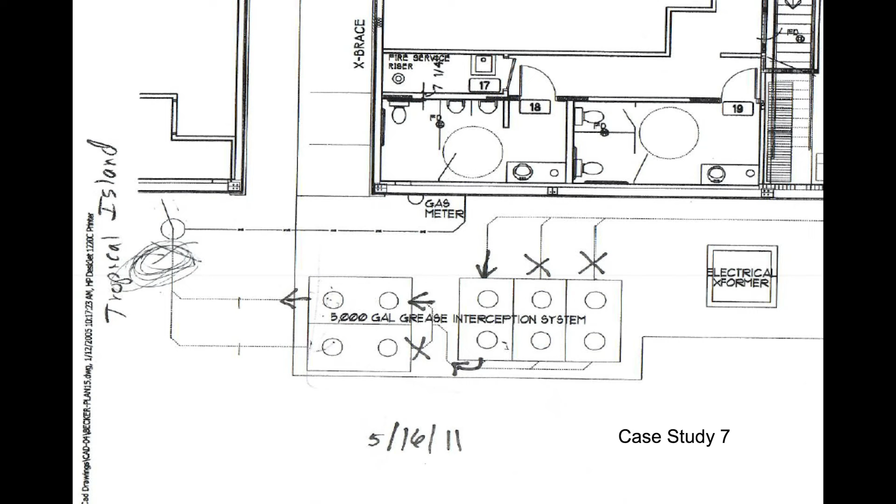Oh, this is my last case example. These are 1,000-gallon interceptors. In 2005, we decided to follow EPA recommendations, before I was involved in sizing them. You get to put five 1,000-gallon interceptors in. Today I'd probably say, how about a GB 250? 250 gallon, 100 gallons per minute, that's high density made by Schier. Canplas Endura makes them, there's a lot of other ones that make them too. I'm sure we have a vendor here that sells them like that too.

But don't oversize them. The facility actually went out of business. So what we did was say, that's too many, let's just take two of them and put them in series. And it's still really high.

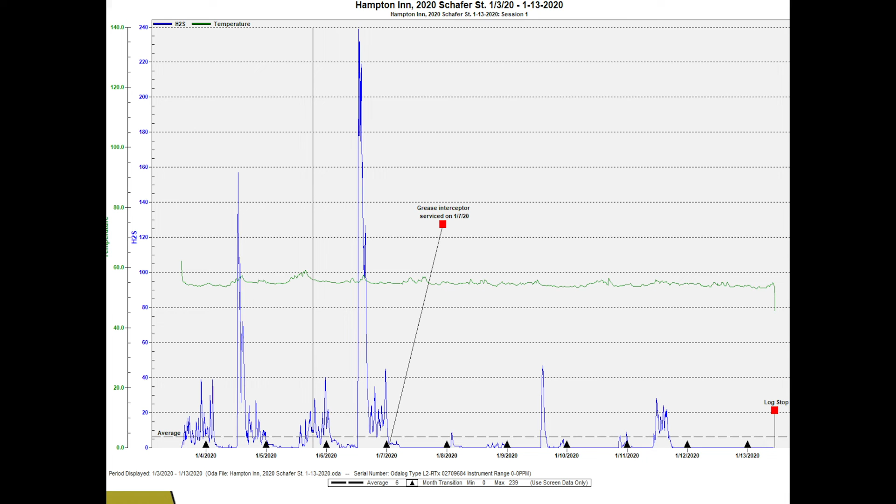Well, the Hampton Inn across the street was complaining about odors. They have no restaurant, they have no interceptor, but they live close enough, and they're in a dead-end stream. Remember how the air wants to go wherever it wants to go once in a sewer system? Well, their parking lot is just awful sometimes. H2S is heavy, comes down, and so just because somebody else has a problem or did it, somebody else gets to have the consequences of smell and odors, and customers aren't happy.

So how high did it get here? 239 ppm. You think somebody could smell that? I'm thinking so. And the average is 6.

Well, after a meal, and all the customers are served, you kick in the dishwasher. Here comes the flow, and that's the sulfides. No flow, it's okay, but also a lot of flow, here comes the sulfides.

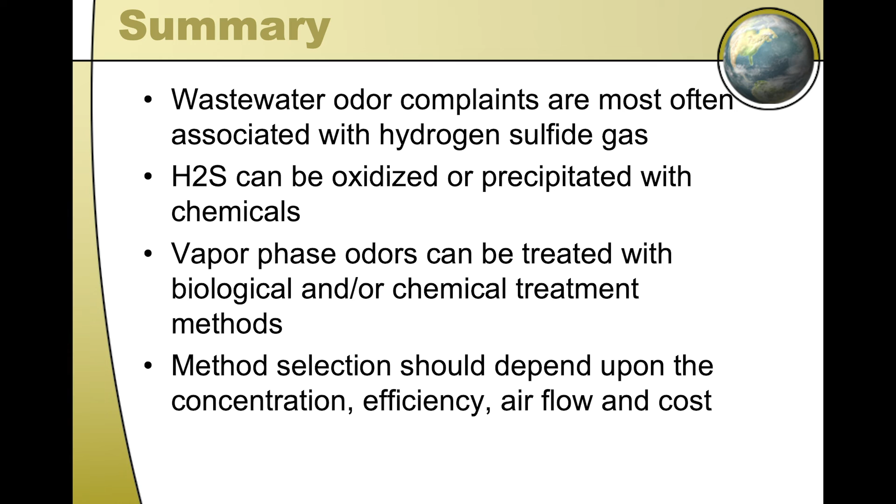Again, we talked about this here. Each location is unique. You can do some jar testing to help you out. It's not perfect. Pilot testing will help you out more. And then test your waters, see how you're doing during the year.

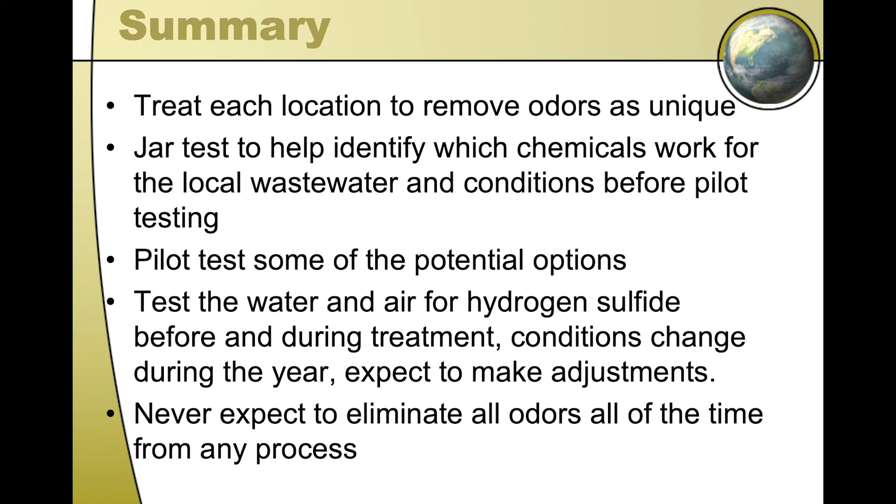Never, ever tell your customers we're going to take care of all the odors. It's going to be their odors. Don't be putting your foot in your mouth. Say, well, maybe 80 or 90%. We'll do what we can, because you can't afford to treat all the odors all the time. There's nuances that go up and down, things happen, you don't know what happened. So say we'll do the best we can, and we're hoping for 90. If you make a promise, you're going to regret that promise. We'll take care of all the odors with us here? Well, no, we'll take most of them.

Questions? Do we have any questions? Yes, sir.

Any other questions? Yes, sir. How long did we run bioxide?